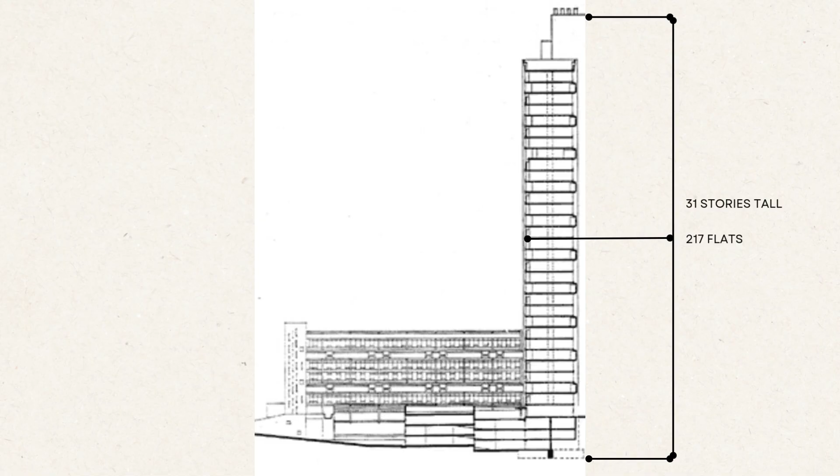As the younger sister of the Balfron Tower, it expanded on Goldfinger's recent project and improved on his design. Standing 31 stories tall, with 217 flats, the Trellick Tower was Goldfinger's new and improved social housing design.

Both the Balfron Tower and the Trellick Tower were commissioned in response to the need for social housing after the Second World War. After Goldfinger designed the Balfron Tower, he and his wife lived there for a couple of months, hosting regular dinner parties for residents so they could gain feedback on the design, and what residents liked and disliked.

Families will spend most of their lives living in the flats I design. I must do everything possible to iron out any problems.

While Goldfinger loved his design, stating, "I would like to live here permanently."

I have found nothing that would make me alter any of my future designs. These flats are really my ideal of a perfect home.

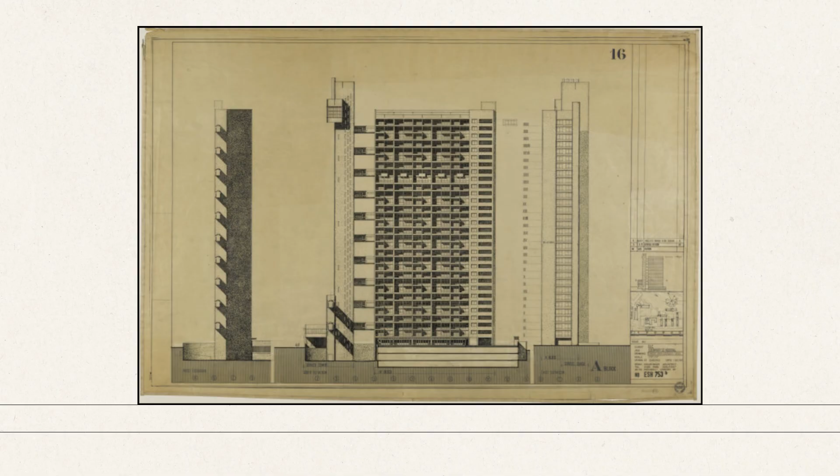The main complaints came regarding the mechanical side of the building design, such as the addition of only 2 elevators. Goldfinger took the information he gained living in the Balfron Tower into his design of the Trellick Tower.

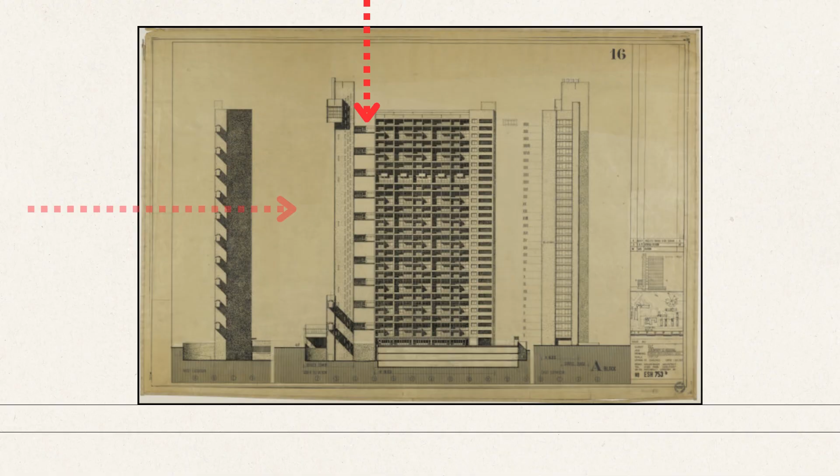Trellick Tower itself was split into 2 blocks, the main being the residential block, and the adjacent for services, connected by external walkways. The services block included the lifts, staircases and rubbish chutes. Locating this separate to the residential block ensured that the noise from the services did not disrupt the residents.

The Trellick Tower was designed with a ground floor with a public plaza, commercial spaces and landscaped areas. This interaction with the street and community was important to the design intent of Goldfinger's tower. The idea of community-focused housing influenced Goldfinger, using the high-rise as a way of keeping the ground clear for children's play areas and amenities, therefore drawing people down to the ground floor, and creating a space for community.

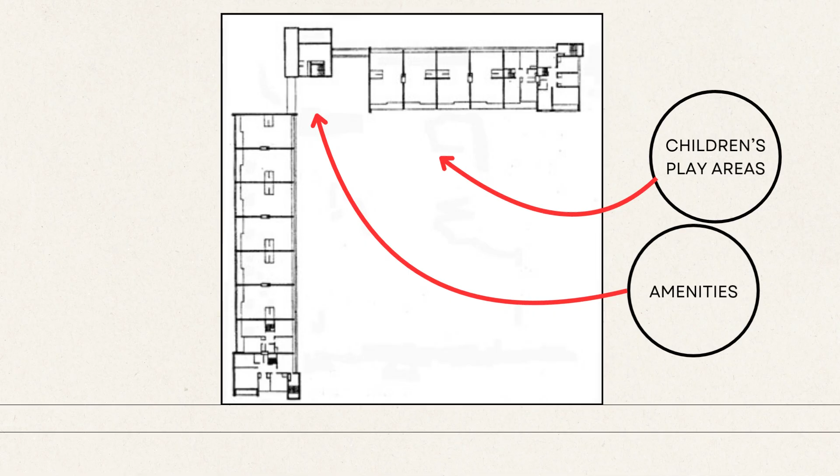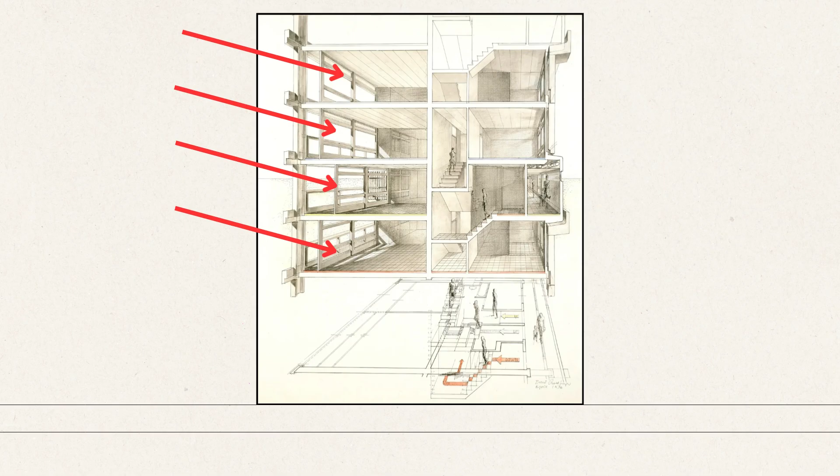The Trellick Tower was designed with a single corridor system, compared to the double-loaded corridor arrangements commonly found in high-rise buildings at the time. This allowed for maximum cross-ventilation and natural light to reach every apartment. Each flat consisted of 2 stories, allowing for the entrance to be every 3rd floor. This spacing of entrances allowed for a reduced number of corridors, therefore allowing more space to be used for apartments.

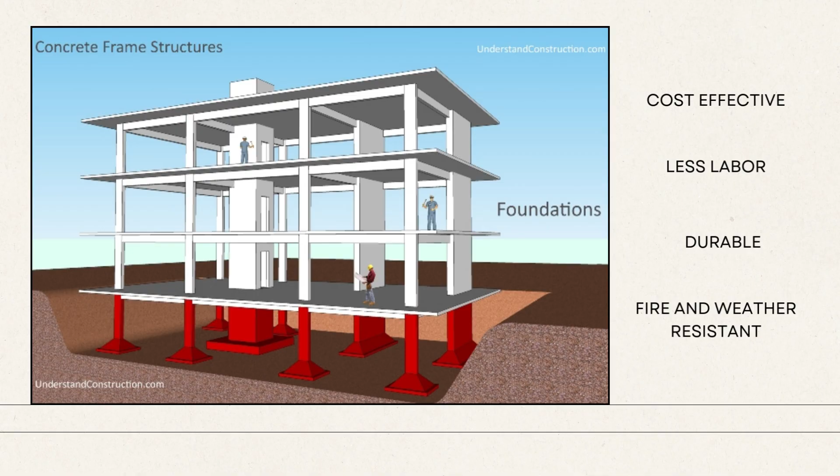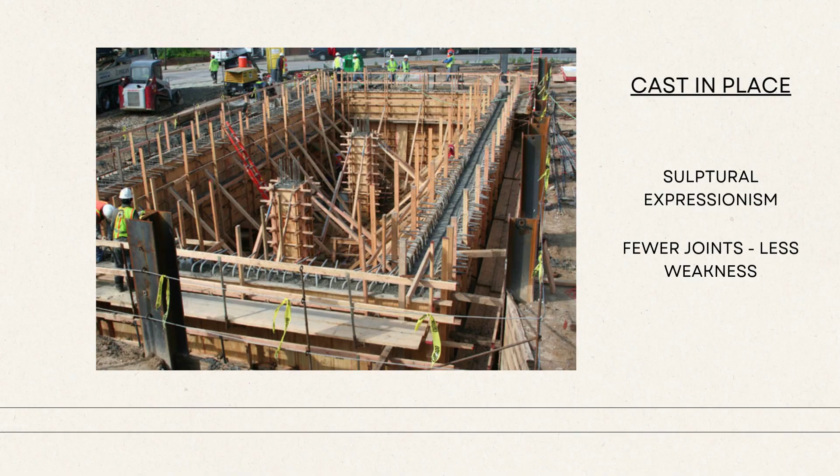The Trellick Tower was designed with a reinforced concrete frame, which was a cost-effective choice for high-rise construction. At the time, a lot of prefabricated pieces were being used to aid in the speed of construction. Goldfinger instead used cast-in-place concrete, which allowed for a level of sculptural expressionism. The vertical load is held by 2 large cores, which allows for flexible interior layouts in each apartment.

From the day that the building opened, crime and disorder plagued the building's reputation. From the lifts and electricals being flooded on Christmas Day, to many reports of assault and abuse, the building became a hub for crime, leading to many tenants leaving the building. Costly renovations were undertaken to try to improve the appeal of the building, but with little success. Goldfinger pointed the blame on the residents of the building, not his design, stating that the building was a work of pure geometry, beauty and the perfect arrangement of horizontal and vertical elements.

The Trellick Tower was a prime example of how Goldfinger integrated architecture with the occupants of the building. By actually living in the Balfron Tower for a couple of months and gaining feedback, Goldfinger's focus on the immediate experience of the user is prominent. Elements such as the adjacent services block showcased how Goldfinger integrated spatial sensation into his design, ensuring everything, even the amount of sound, was considered in the user experience.

Goldfinger's approach towards social housing aimed to create equalization amongst the community. Through his integration with occupants and architecture, Goldfinger shaped the architectural approach for social housing.